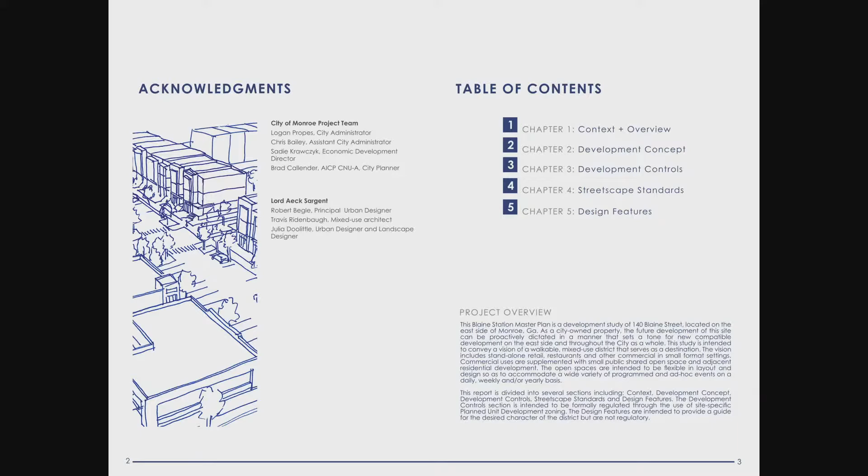We looked at a lot of the surrounding properties, and in particular, potential opportunities for off-site shared parking. There's a lot of surface parking here, but we're proposing some infill development, so we're taking away some parking and adding parking demand, so we thought that was an important way to look at it.

This is really a former shopping center, so it's not a walkable kind of place, and that's the most important part of our vision here, was to create a destination, someplace walkable, with a mix of uses and a variety of things in it, as opposed to just being a big surface parking lot with an old shopping center behind it.

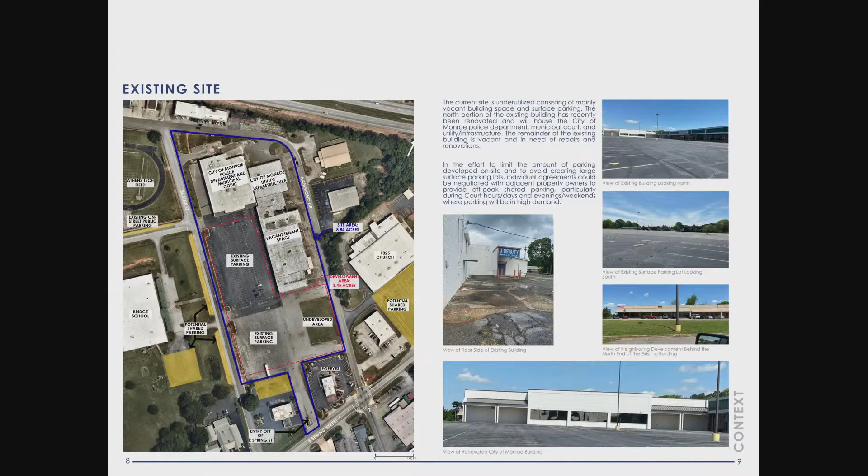The shopping center is really deeper than you need, and you have this odd condition where Hammond Street runs across the backside, so it's really like the loading dock side, but it's on a public street. Because we have that added depth, we came up with the notion that we could split the retail into storefront facing out and storefront facing back towards Hammond. So that's an important concept, creating 2 front doors.

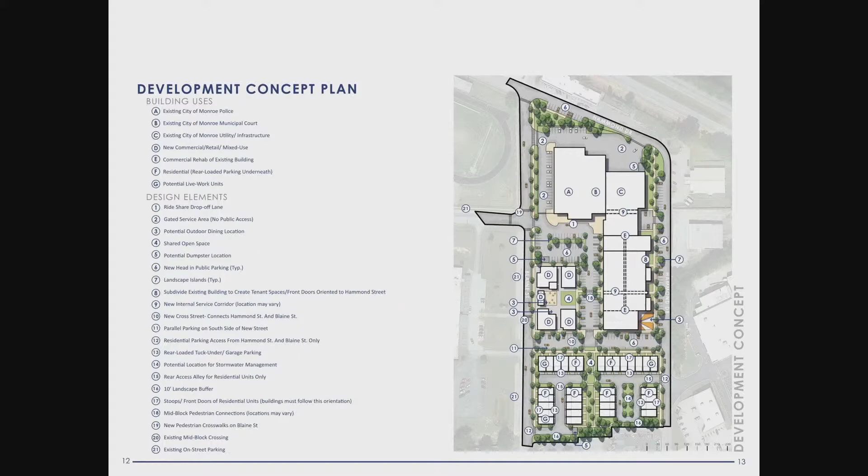We have the municipal court here, so it was important to create enough parking that could operate during court hours, and we got this notion of secured police and related parking on the backside with access to a sallyport and some of those kinds of things. We spent some time with the police department to understand what their important drivers were.

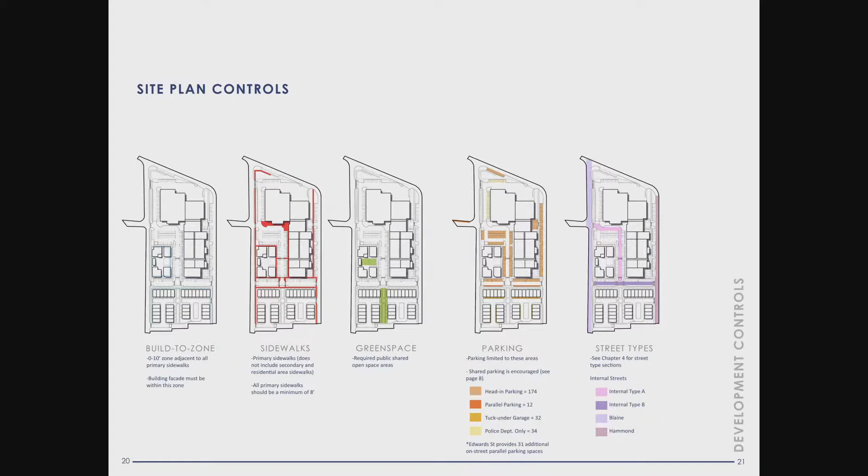Parking, again, we didn't want to set up a scenario where a developer might come in and just build another gigantic parking lot, so we've decentralized the parking and shown the locations and quantities of where that could be. And finally, street types, so we're breaking up the site with a couple new streets that cut across and up and down to break it into smaller blocks.

There are different controls for how many square feet of building area and what type could go in each sub-area, with a focus on more commercial and mixed use in the pink area and more residential in the yellow area. We have ranges for quantities of units, building heights, and maximum facade lengths. Individual tenant size was important to cap, so we didn't end up with a big box store that defeated the walkability aspect.

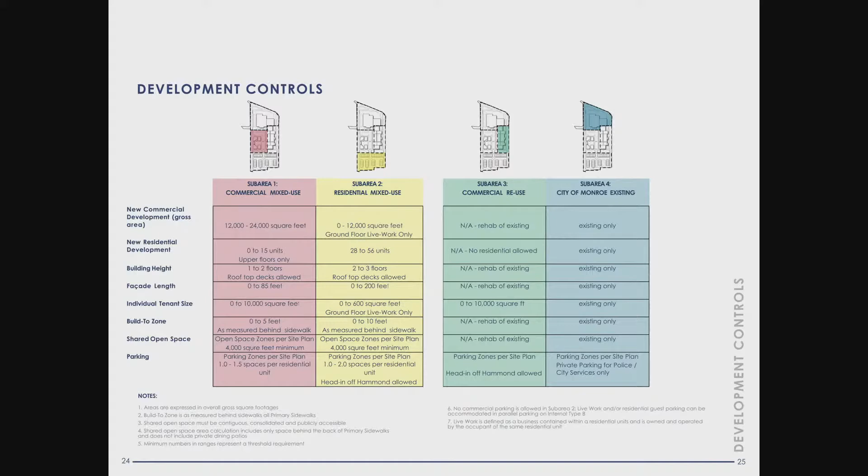The build-to zone, which I already mentioned, and the open space and parking. We also have a list of allowable uses—Brad in particular spent a lot of time going through your zoning code, and we customized which permitted uses would make sense in which sub-area. And then finally, as I mentioned, these are the design features.

We have about 10 different sheets of these. Again, these are not regulated in terms of the code or the rezoning—these are more design guidelines, so when the city goes to solicit and procure a developer, they can hand them these and say, this is what we are thinking, this is what we think it could look like.

When we first started the process, we spent some time in this room, put up maybe 100 pictures on the wall, and asked your planning team and staff to go through and pick them out. What really jumped out was some notion of this being small scale, not overly large, but also not exactly a knockoff of what Main Street downtown looks like—not intended to be super traditional, but with a bit more of a contemporary notion to it.

So we have a sheet that looks at this from the commercial side, and another that looks at the residential side. We also have sheets that get into signage, open space, parking, and a number of other aspects.

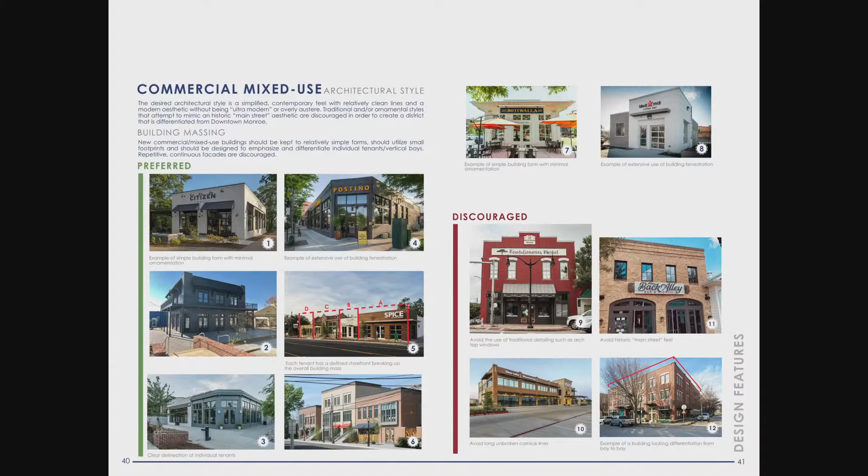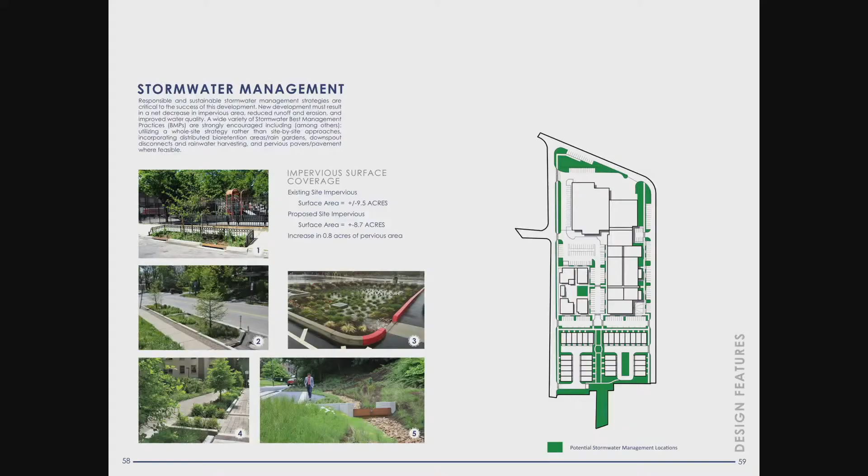As I mentioned, it's about a 60-page report, so there's a lot more in there than I've presented today, but I'm happy to dig back through anything and answer any questions. Logan and your team, feel free to jump in on anything. You all were a big part of this, so with that, I will open it up for questions.

I don't have one, I'll simply say that it looks nice—lots of details put into it, and I think it's very well thought out and much needed for Monroe. Great, yeah, we think it could be a new anchor on this side of town that could make a big difference. So it's been great to work on. A lot of fun. Any other questions, comments? Thank you very much. Thank you.

I would ask at this time if there was anybody present to speak in opposition to this request. Seeing none, we will close the public hearings, and I will entertain a motion to approve or deny. I move we approve. Second that. Motion to approve and a second. All in favor say aye. Aye. Unanimously approved.

We will open the public hearings again, on item number 2, a zoning text amendment number 12. Code officer report. Yes sir. Thank you again. Just like the previous presentation, this is a city instigated request, and it's basically to alter the zoning ordinance with the text amendment. Sorry, I'm trying to find my cover page—bear with me.

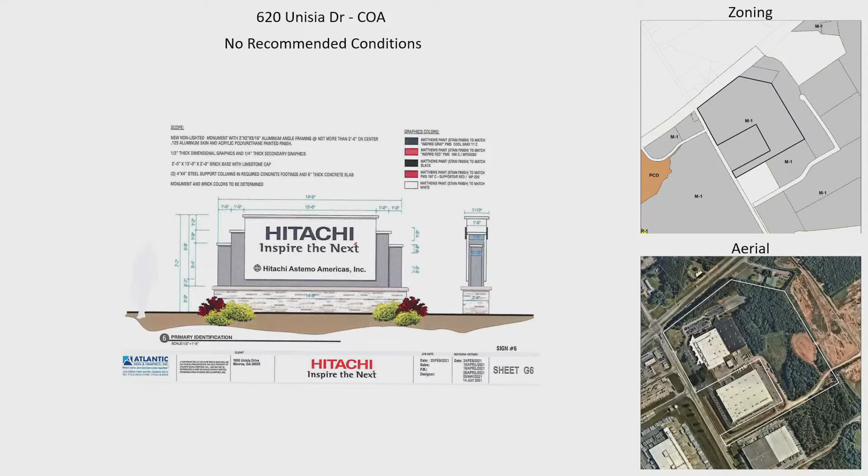Anyone present to speak for this request? Anyone present to oppose this request? Seeing none, any questions, maybe for Patrick? We will close the public hearings and entertain a motion. Motion to approve, and a second. All in favor say aye. Motion is approved.

Declare public hearings open for item number 4. Request for a COA for a convenience store with fuel pumps at 1530 South Broad Street.

Mr. Code Officer. Thank you. As you stated, certificate of appropriateness, case number 252 at 1530 South Broad Street. You've got the staff report there and in your packet, and it contains 4 conditions. Staff recommends approval of the certificate of appropriateness with the 4 conditions listed in the staff report. If you would want to have them read, I'd be happy to do so.

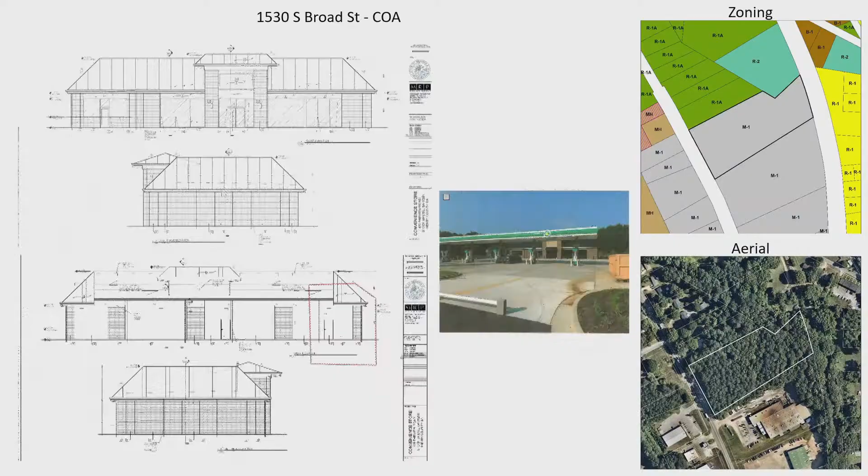Is there anyone present to speak for this request? Yes. Could you come and tell us who you are? Good evening, Mr. Chairman, Commissioners, my name is Clint Dixon. Address is 5230 Bellwood Court, Buford, Georgia. We're here before you tonight requesting the COA for a convenience store at 1530 South Broad Street.

What we're proposing is an 8,100 square foot convenience store with 2 attached retail spaces, each approximately 2,000 square feet. We're also requesting 5 gas pumps, 10 fueling stations. We've met all the overlay requirements and parking, and we're okay with the 4 conditions. So you understand the 4 conditions and you approve? Yes, sir.

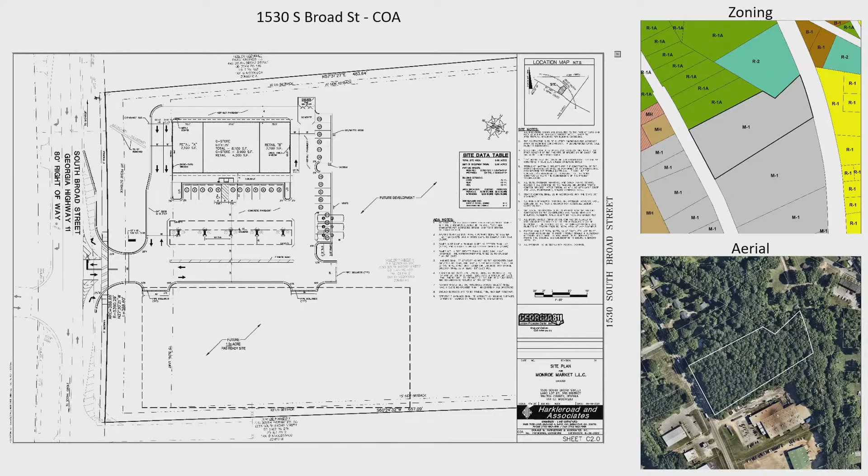Any questions? Can we go back to the previous sheet, the one with the site map? So you're not intending to take up the entire piece of property there? What we're looking at is a phase 1, phase 2. The vision for phase 2 currently, which is still subject to change, but looking at some type of fast food use.

And the future use section is currently unoccupied as well? Yes, sir, though there's a house on the adjacent property. Is that the wooded section outlined there we're talking about? Yes, that is. Just for bearings, where in relation to South Broad is that? Just north, before Elite Storage, across the street from Dollar General.

Any other questions? Thank you very much, Mr. Chairman. At this time I'd ask if there was anybody present to speak in opposition to this request. Hearing none, we will close the public hearings, and I will entertain a motion to approve or deny.

Approval would be with the four conditions. I will motion to approve with the noted four conditions by the staff. Second. Motion and a second to approve with conditions. All in favor, say aye. All opposed? Unanimously approved.

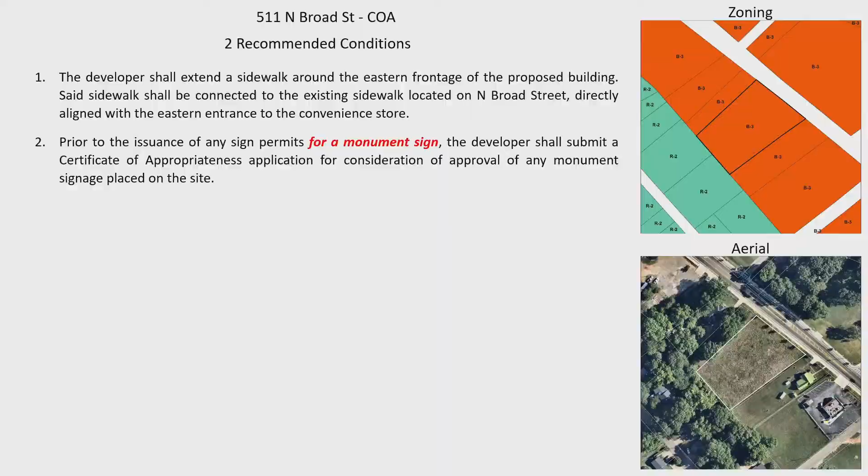Is there anyone present to speak for this request?

Give us your name, please, sir. My name is Tejas, and with me I have Shamsun Nahar. The request is for a COA, and it's a C-store, 3,000 square feet, and 2 retail stores with it, 1,000 square feet each.

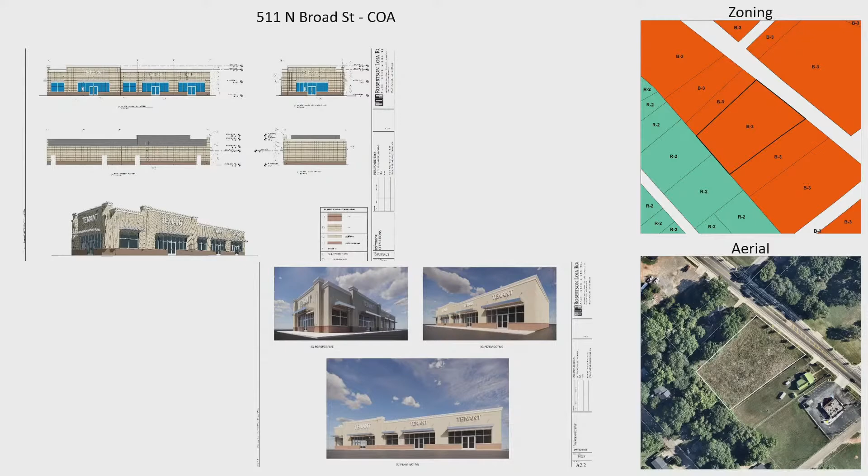Once again, where in relation to North Broad is this? South of the churches, two lots north, on what's been basically a mulched down, vacant lot. There's a concrete divider there for traffic flow currently on that section of the street, so there's only one way in and one way out, is that correct? If you go back to the site plan, there's a right in, right out, and all of this would be subject to DOT approval.

That was my next question. Would that need to be stipulated as a condition, or is that not necessary? If you don't get the DOT's blessing, you're pretty much done. I would also pass that once a curb cut is approved by GDOT, the applicant would be able to repair and replace the sidewalk.

Is that what's being defined as the eastern boundary or eastern frontage currently? Yes. Is that one of the two conditions right now? Yeah, that's correct. Let me clarify the answer to your question. What we did was add a condition that required a sidewalk to be extended from the front of the store to connect to our sidewalk. I'm indicating it with the laser there on the screen.

So they've shown a sidewalk in the front of the building, and what we're saying is that we want the sidewalk extended around, and then extended straight out to the street, because based on their architecture, you can see they've shown a windowed entry and frontage on this side of the building, so we're asking that be extended straight out to the street. So the condition Logan mentioned would be in addition to these two conditions.

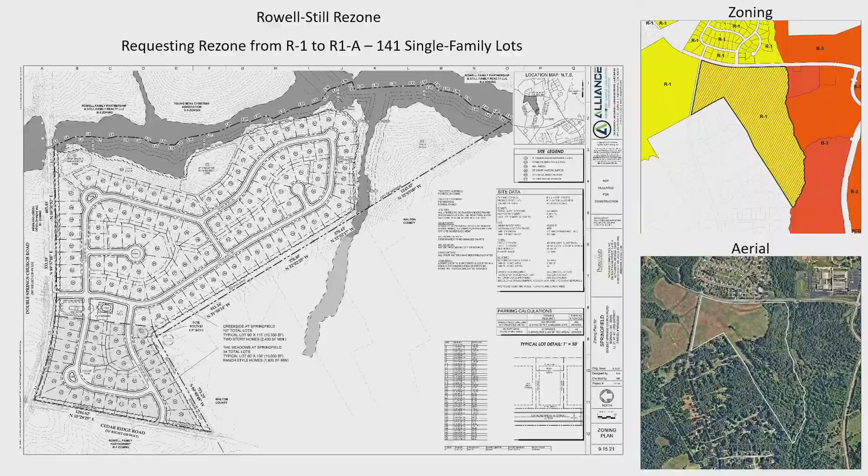Adjacent to the amenity area, there will be a parking lot, which will supply plenty of parking spaces for residents who don't want to walk to the pool or to get their mail, and also extra spaces for any overflow.

Overall, the development will have a density of 1.69 units per acre. That's significantly less than the maximum allowed in the current zoning district, which is 3 units per acre, and even less than the proposed zoning district, R1A, which is 4 units per acre.

Along the eastern and southern property lines, there's a creek and a stream that bisects the southern portion of the subdivision. Within this area, there's also very dense vegetation with mature trees.

The slightly smaller lots permitted in R1A will provide us the opportunity to cluster those lots outside of those environmentally sensitive areas and preserve a substantially larger amount of woodlands and open space. Under R1, the current zoning district, we would still be able to meet that same density, no problem, but we would have to encroach into some of those areas I mentioned.

This includes that large buildable portion in the southern area, on our right at this look. We would be able to build in that area, but it would include quite a bit of clearing and land disturbance and a stream crossing, but it would be buildable. Again, it's doable, but we'd like to limit as much land disturbance as possible.

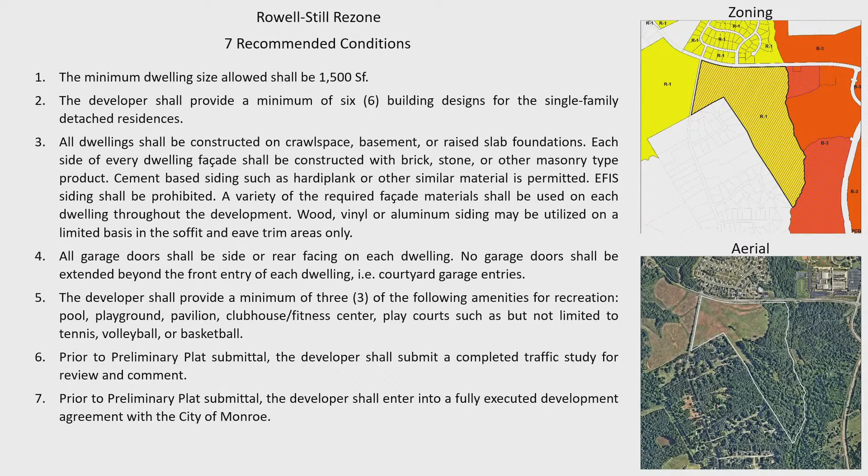Thank you. Will both parcels, both projects have City of Monroe utilities? Yes, if built, though it depends on service delivery territories, but I think all of those utilities would be provided by the city.

Another reason I'm going towards tabling also is because I have some infrastructure questions. Exactly.

I'll make a motion, we table. Motion is that we table until December. Till December, I think that's fair enough time to consider. Motion is that we table until the December meeting. Second. All in favor say aye. Aye. Tabled until December.